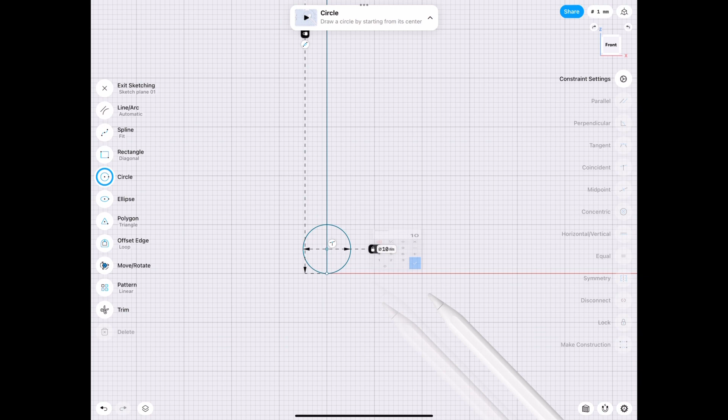So I just had dinner and I really want a popsicle, but I don't have access to one right now. And I decided to draw one. So we're gonna draw a line and then make circles on the ends because we're gonna draw the stick that we need. And let's make that exactly 10, so that it's identical on both sides.

After we do that, we simply copy over the line. Make sure you select copy, and then another option is we can mirror it over since we have a center line to work with here. All right, now all that's left to do is extruding it by selecting all the closed sketches. And we're gonna do just 1 millimeter on this side because we want to center it.

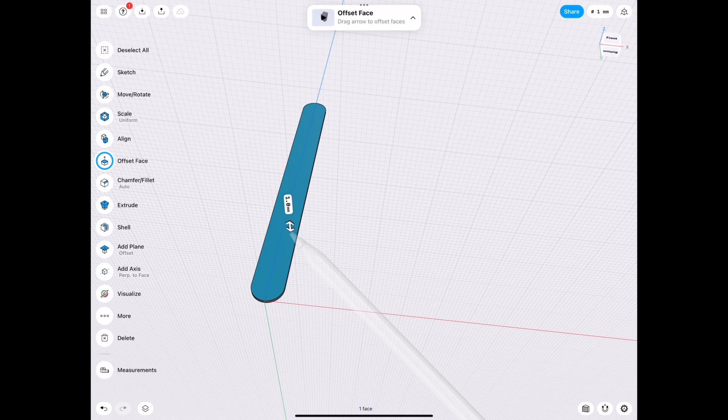And for that, we need to hide the sketch and then go ahead and make it 2 millimeters from this side. Once that's done, we just need to hide it so it's not in the way. But before that, you know me, I like to work with colors. Let's make it look like a wooden stick, just so we can have that reference for us, image-wise. It just feels better to work with it like that.

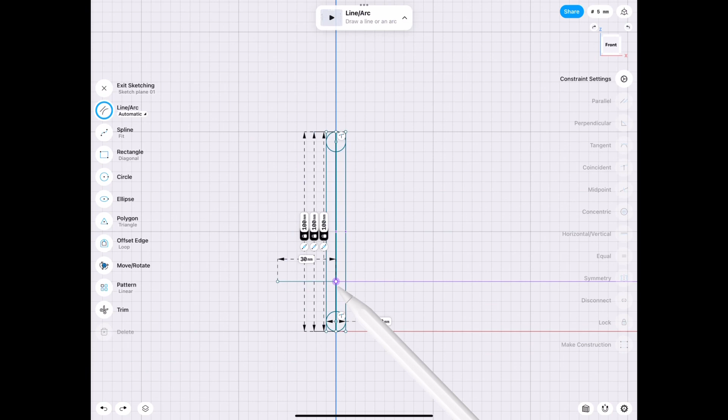Moving on, we hide the popsicle stick. Now we need to draw our actual popsicle. And there's many ways to do this, but just go ahead and sketch so that the sketch appears again, or you can click the eye. And then we sketch a square in this case. Like I said, one of many ways. But in this case, we're going to sketch a rectangle. Not a square, but a rectangle.

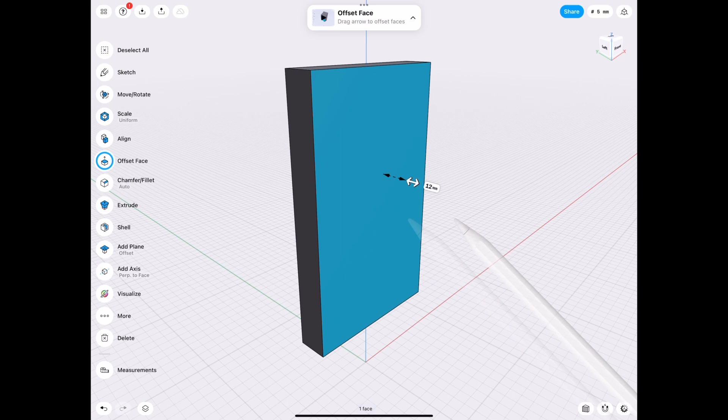And we're going to go ahead and extrude that, just like we did with the popsicle stick. And because we didn't delete the older sketch, we obviously had to select those two. But let's go ahead and hide the sketch again and then double it again so it's in the center. And I actually want this to be a red popsicle, and we're going to make it slightly transparent so that we can kind of see that it's a popsicle, juicy.

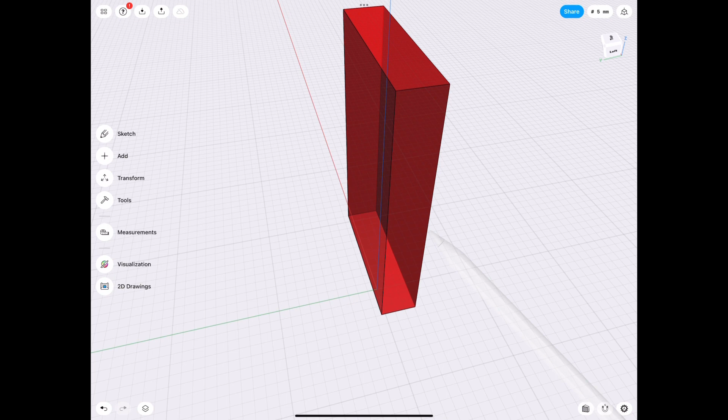And let's go ahead and make this a little bit thicker because 12 millimeters seems like just a little too thin. And let's make it 15. And what we can do now is use the scale tool by selecting just the edges. We don't need the faces, just the edges. And in this case, uniform. And we're going to do 0.8. Let's do 0.9. That'll make it look a little bit better.

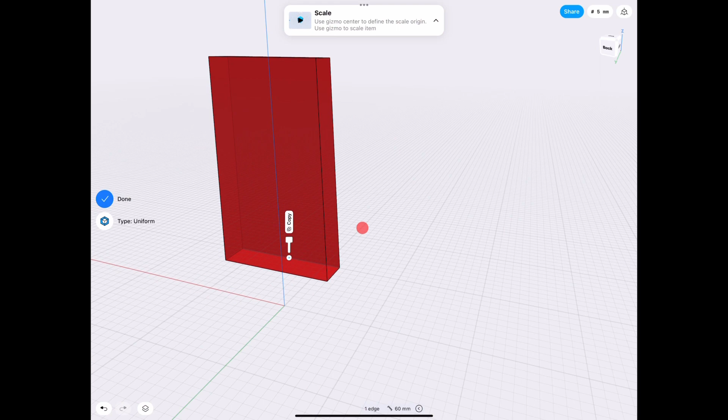And for the bottom, we want to do something similar, except in this case, we don't want the whole thing to move like that. We don't want the sides to move out. We just want the front and the back face. So we need to make a non-uniform scale by selecting those edges and pulling out, and now we have a wider bottom part, but it's identical on both sides since we selected both edges.

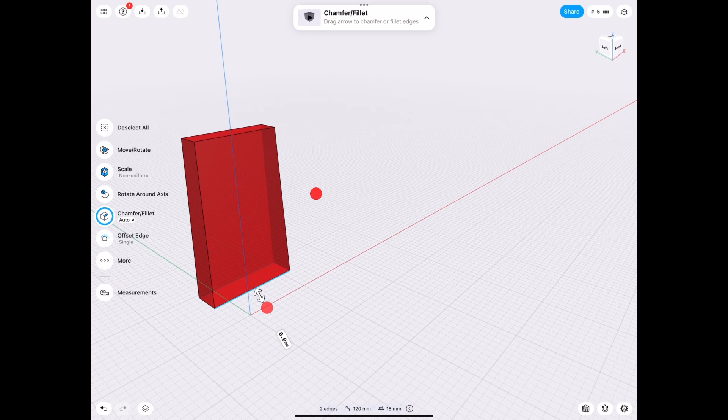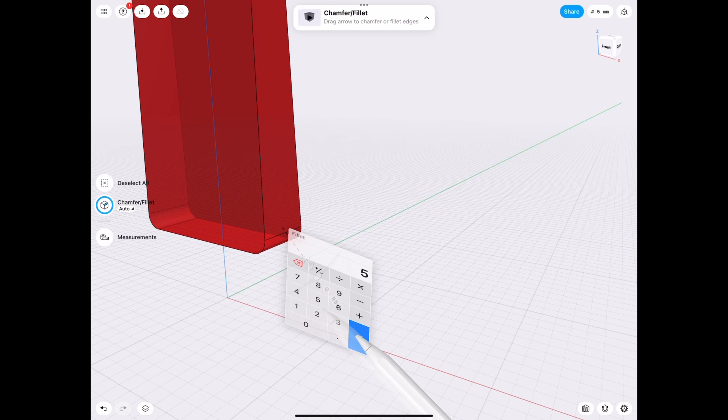All right, moving on from that, we can go and fillet the edges to make it look slightly more realistic. And I forgot to unselect the bottom. Let's go ahead and unselect the bottom and redo that. Just select the top pieces there because we want to make those slightly different. So 10 at the top and slightly smaller at the bottom by making it 5 millimeters here. And that just makes it look more natural for some reason to me.

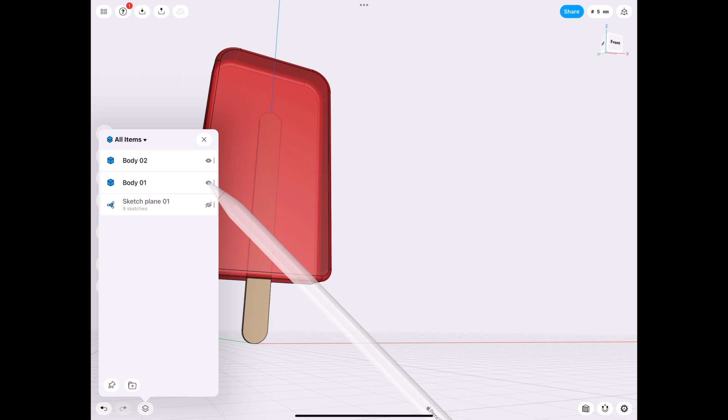I don't know. But let's go ahead and just select both of those faces and then select the chamfer fillet tool to make it easier so we don't have to select all of them. Once we have that, we basically have a solid popsicle. But if you remember, as a kid, we got those really cheap popsicles that had those wedges in them, I'm assuming from the manufacturing process. We can add those.

But let's go ahead and first subtract the stick and then change the color back so it's uniform, because otherwise it would leave the brown on the faces that it subtracted.

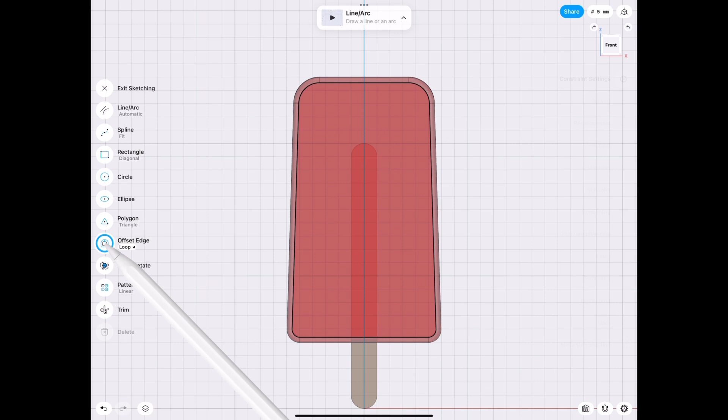But yeah, let's go ahead and move on and make those little wedges just for the fun of it, so you can see the process of how you can add something to something that supposedly is already done. And what we need to do is offset to whatever size we want, just so we can reference it, and in this case, 10 millimeter looks pretty good. And I'm going to extend that line down, and also the top one.

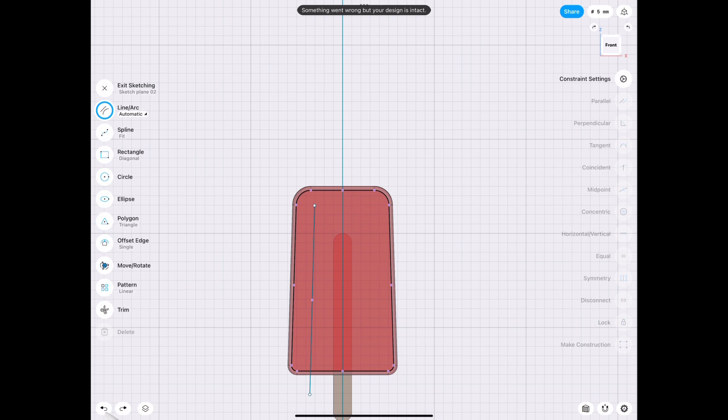And watch out, my hand kind of slipped on the iPad there, so watch your hand when you're doing this. Just undo when you mess up. Slide it up again for reference. So we have that extended thing, so it's not stuck inside. And then we're going to just draw a circle on the bottom.

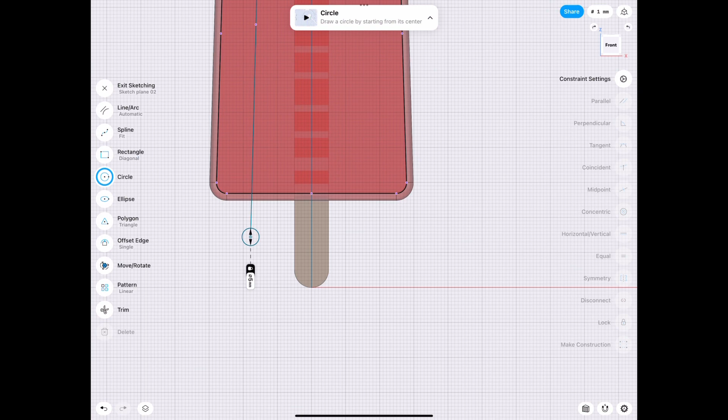And the size, honestly, it's kind of up to you. I'm just going to make it look as realistic as possible based on what I remember these are. I actually bought these a couple weeks ago for my kids at Winco, but definitely not 75. I think probably around 8 or 7 would look the best.

But now we go ahead and select it, and we just rotate it by 90 degrees. And we have to test to see if this looks good. So at first, instead of making all 4 at once, we're going to go ahead and extrude it just to see what it looks like, if it's in the right place. And it does follow the line, but it's kind of too straight for me.

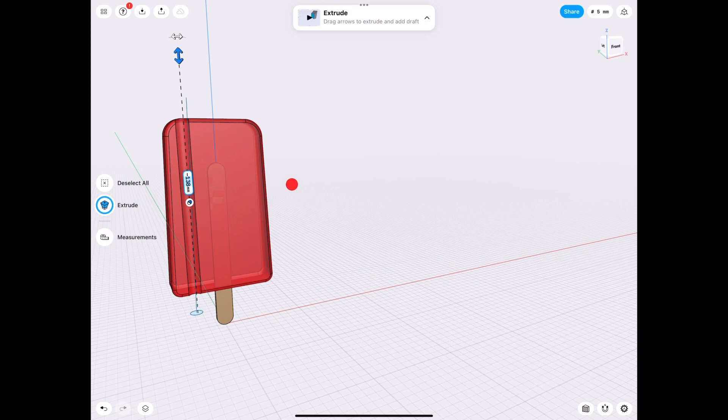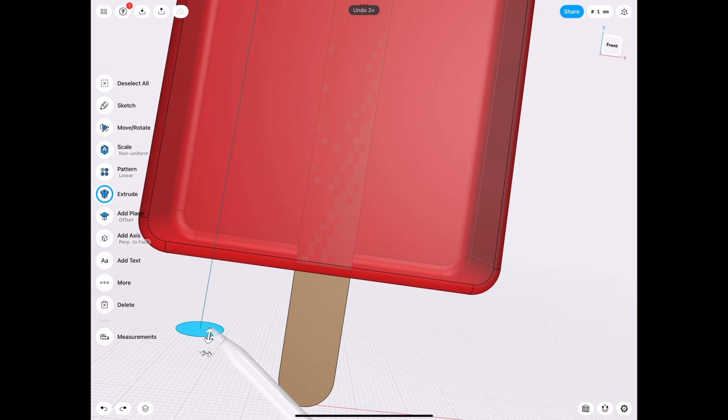So what we need to do is go back and just rotate that just slightly, maybe like 5 or 2.5 degrees. And let's see how that looks. So we extrude that, and I don't like it. It's a little bit sideways. Let's do 2 degrees. I think that's gonna look better. All right, now that we have that, we extrude it, and I do like that.

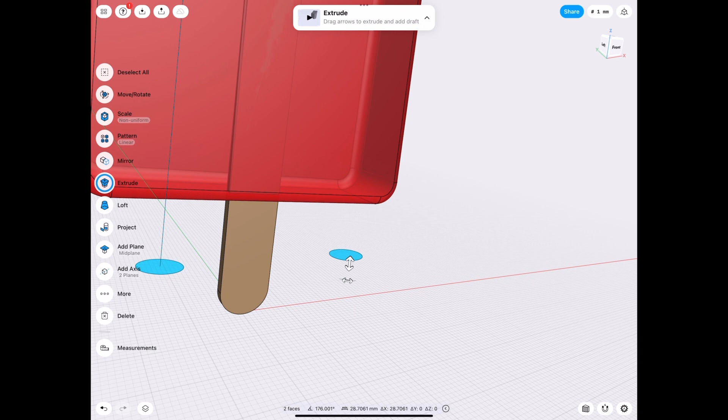So now we just undo so we can replicate the circle. We're gonna go ahead and just mirror it over on the axis plane, and then select both of them and mirror it over again to another axis plane. And if you don't find it in the little menu, it's probably up there. Sometimes it moves depending on the situation, so just keep that in mind. And that's the wrong plane.

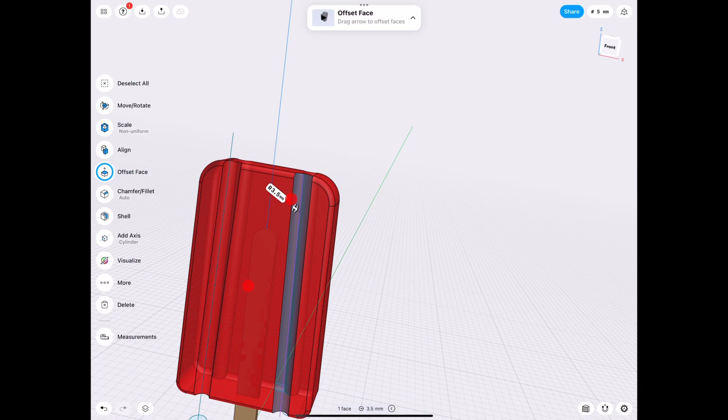But yeah, now that we have all 4 of them, just go ahead and select the circles, and we just pull those straight up. It's a piece of cake. And we do want to fillet those, so we select those edges, and we're going to use that chamfer fillet option again, so we don't have to select any edges. And then just do 2 just like the surroundings that we did. Now it looks just like a legit popsicle.

If you remember, I actually really want one right now. I just had a whole bunch of saliva appear out of nowhere.

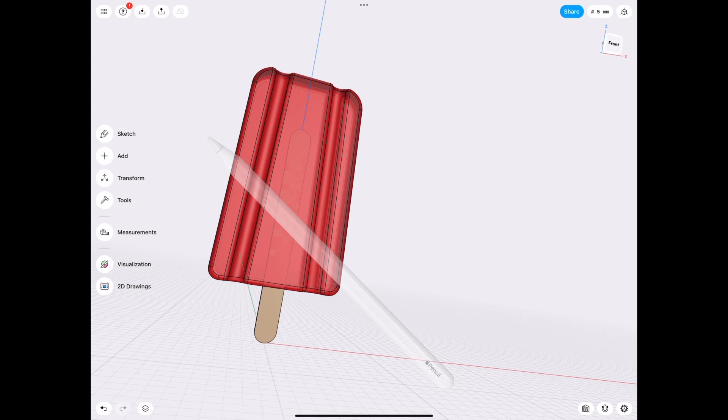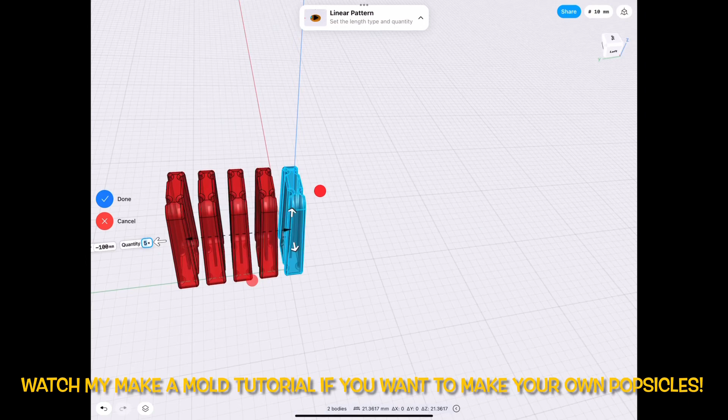But yeah, this is pretty much it. The only final step I would do is let's add some flavors. You know, I love flavors. My personal favorite was probably the blue one, but let's go ahead and just copy those over with the pattern tool, and we're going to make a couple different ones. So we have those lined up, and then we go to visualizer, and since we already have a copy of that, we just select the different colors, and it's already transparent for us.

So go ahead and change the colors as necessary, as whatever you like, and comment down below which flavor was your favorite, if you've had these when you were a kid.